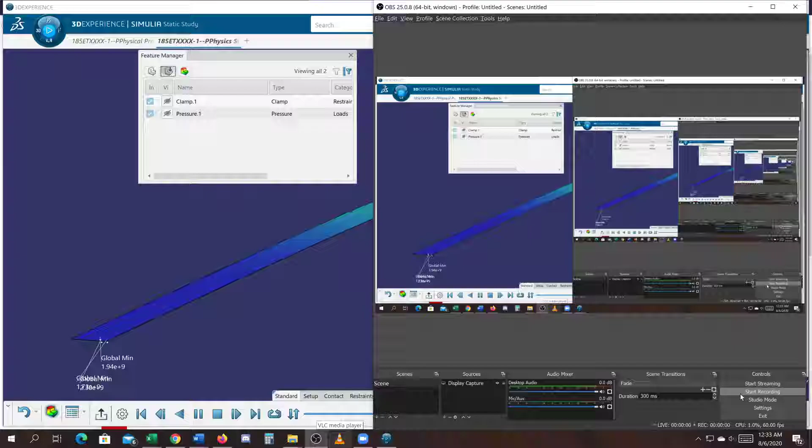This is going to be an exercise on the stress analysis package. This is what we're looking at, von Mises stress analysis. I have a load pushing straight down, and the end on the top where the red is flashing, this end has been clamped. So when we put pressure down on this plate, this end over here is taking on the majority of the load. This is where it's most likely going to fail.

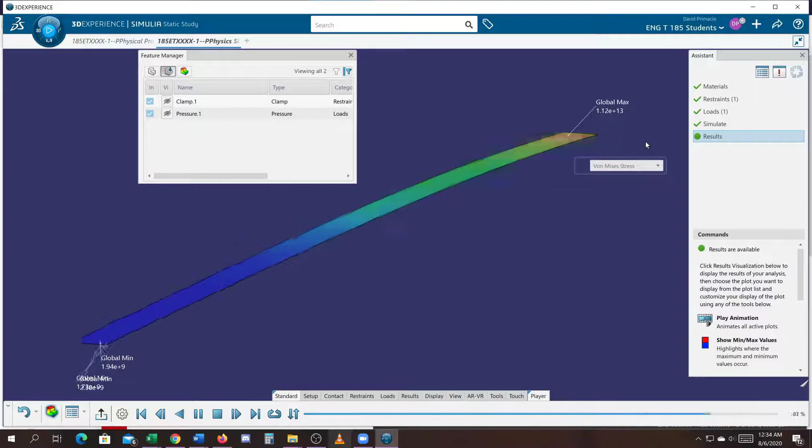So you can run the stress analysis package. There's several different types of analysis you can look at, starting with the first one, the deformation. Again, I've clamped the top end so it can't move, and I'm putting all the pressure and load on this end, and just showing you per pounds of pressure, however many pounds of pressure I've got. It's going to analyze the thickness of the plate, the type of material, and show you the range of motion you're going to have.

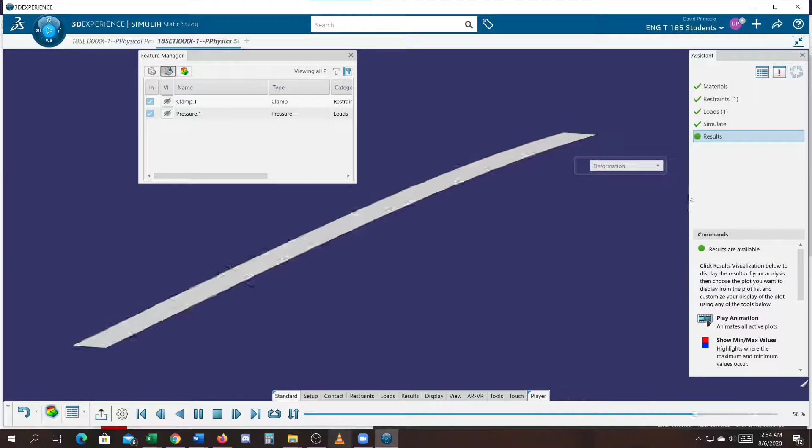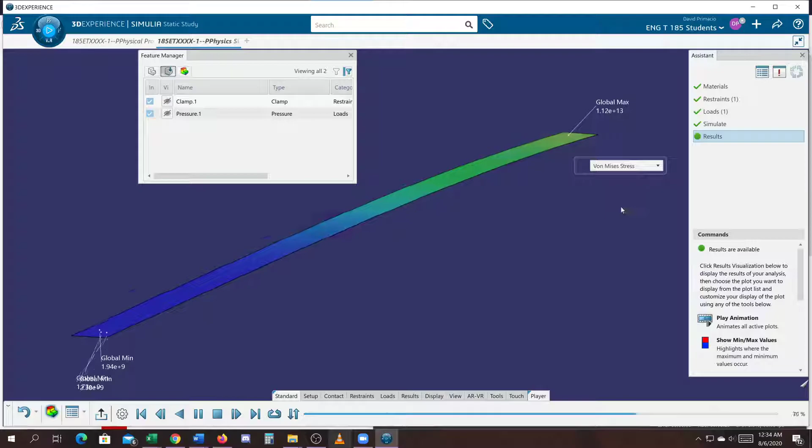The displacement, which is kind of the opposite of the von Mises stress, is this area over here is blue, and this one over here is showing the most red. This end is the end that has the most motion, and this end is the end that has the least motion. Versus the next one down, the von Mises, it's showing you where the greatest load is. And then you have factor of safety one, the red indicating when it's at a dangerous point.

And I don't know how to slow this down. I've tried, and my intuition is to try and go into these options and try and slow the settings down. But every time I hit it, it crashes. So I'm not really sure how to slow that motion down.

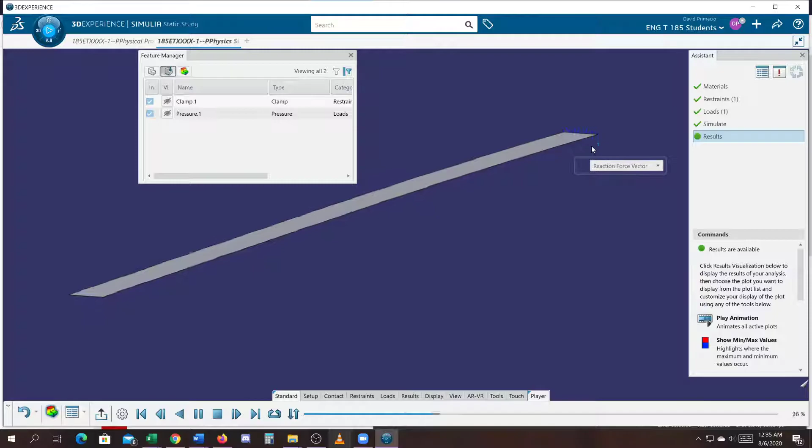This is the reaction force vectors. Okay, so when it goes, it's putting pressure down. One way where it's going to go up, it's showing pressure, and then where it's not going down as much, it shows a different color. So you got your different colors representing where there's more pressure and less pressure. And then

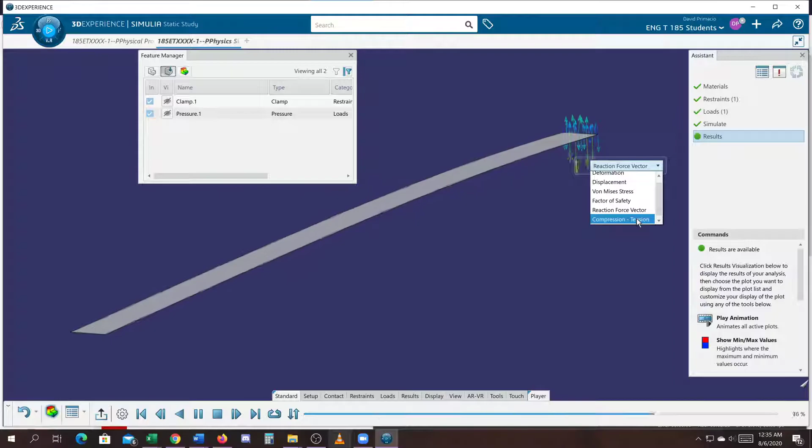the compression tension. So basically, if you're pushing pressure on this very end, the very closest part here is getting the least amount of stress on it. Over here is going to be the most, and as you work your way out like a fishing pole, kind of, you're getting more pressure on the part more towards where the clamping is. Rather out here, you're not really getting any kind of pressure on that plate.

So for people wondering how to work the stress analysis package, where it's gone, what they've changed it to, I'm going to try and do this from scratch, and we'll see how that goes. What I do kind of like about the new package is it has all these check marks going down the list. It's kind of like the prismatic machining, the NC programming section, where it checks it off when you've got everything you need. And then we get to the results and we get to play the animation.

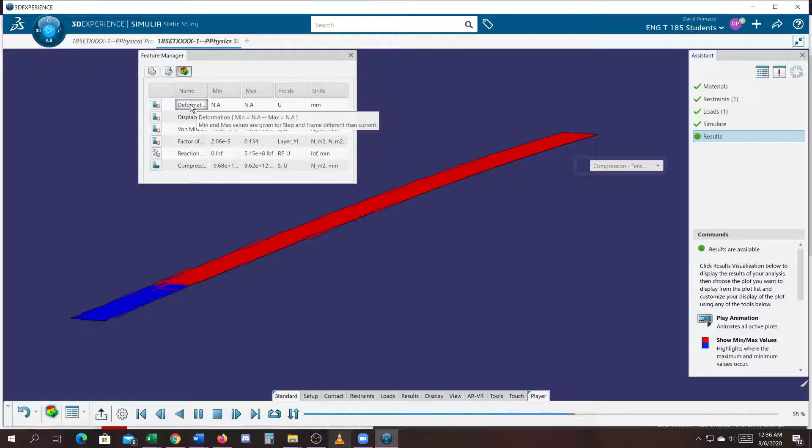So once everything's got the green check, you get to results, you get to hit play, and you'll get to see this. And in the analysis, you have information on each type of analysis that we ran. This could be downloaded onto a paper. So let's go ahead and try this from scratch. I'll just create a new part.

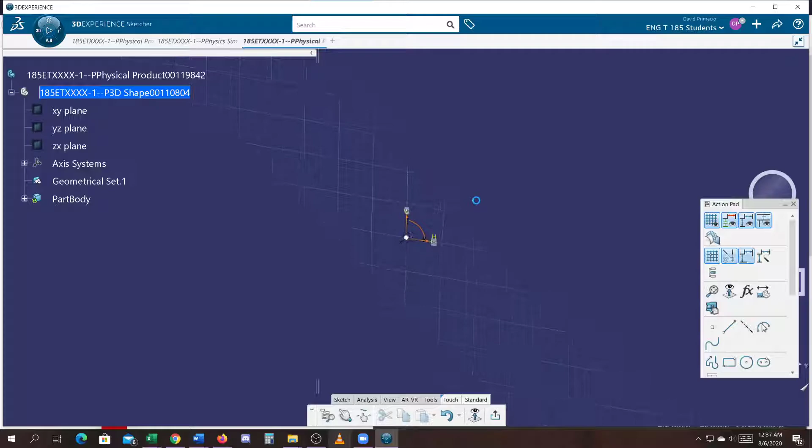And we'll make the part body the in-work object. We'll go into a sketch. And I'm going to sketch a really thin plate so I can have motion, make it crazy big. We'll start here, and I'll just type in the width. Type in a width of 20, and we'll just keep that a 1/10 of an inch thick height. I'll highlight this whole thing and auto constrain this. It's fully constrained profile.

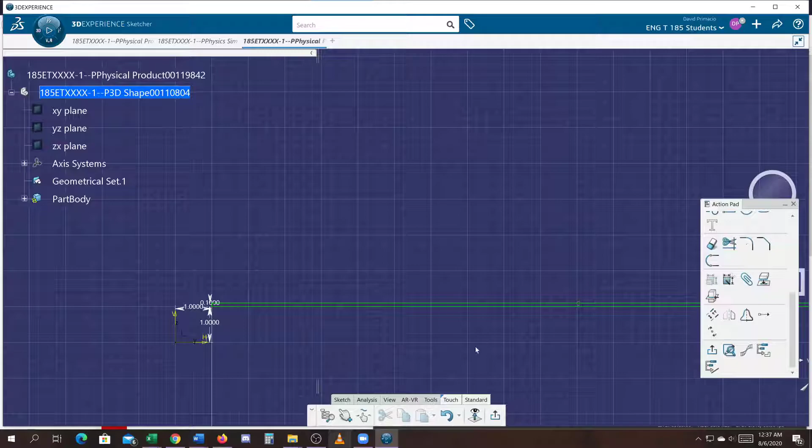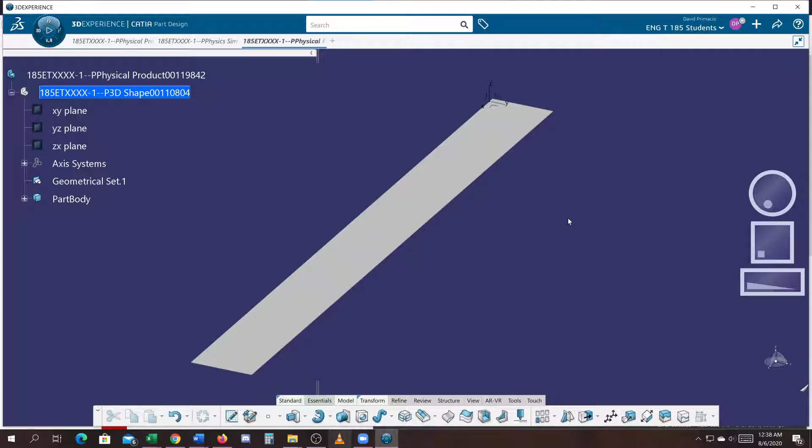We'll exit out and build a pad. And I'm going to make it pretty long. I'll go 200 inches. Okay, so I got this big, long, skinny plate, and I'm going to go into, it used to be called finite element or stress analysis or something here. The one I ran was called static study.

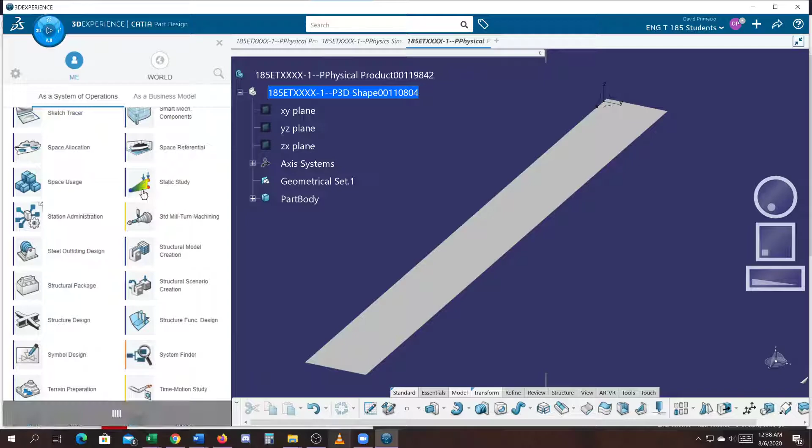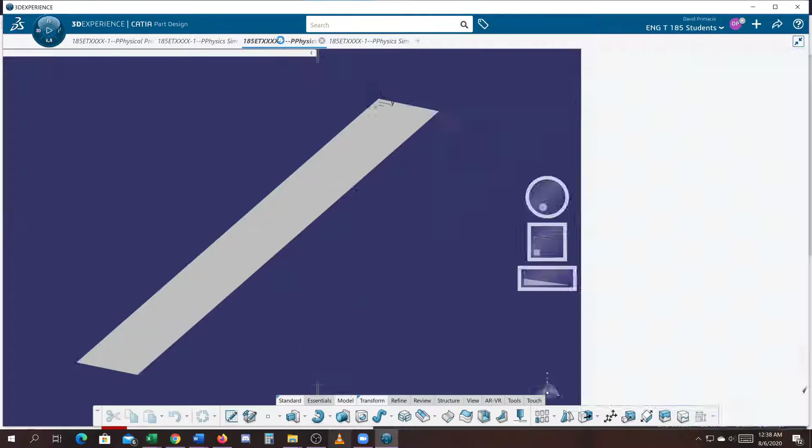Right away it's telling me I don't have any material. Now I can click on here and then hit material palette and then go add a material, go do a search and find the material. Or right in the middle of this, I could just go right back to the actual part itself. As you'll notice, the stress analysis creates a whole new working environment. So back in this part here, we can apply the material like we've learned in the previous classes

by applying material down here in the tools options. And I'm going to search for 6061 aluminum, and I want to get the one that says core, and that's the one I want to apply. So we're not opening it, we're applying that. So you go ahead and hit apply, and then you have to close this window off.

You'd think it'd know to close it off for us. I'm going to pick the top collector, which shows the material down here in the bottom.

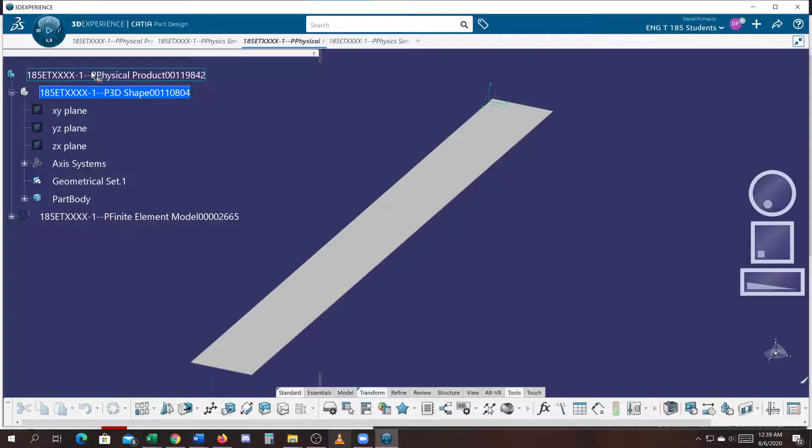There's your 6061. That all looks good, so I can go ahead and hit the close command. That's the green check in the top middle of the screen. You can just click that and it'll apply that material. When I go back into the part, you'll see that the green check mark has been applied for material.

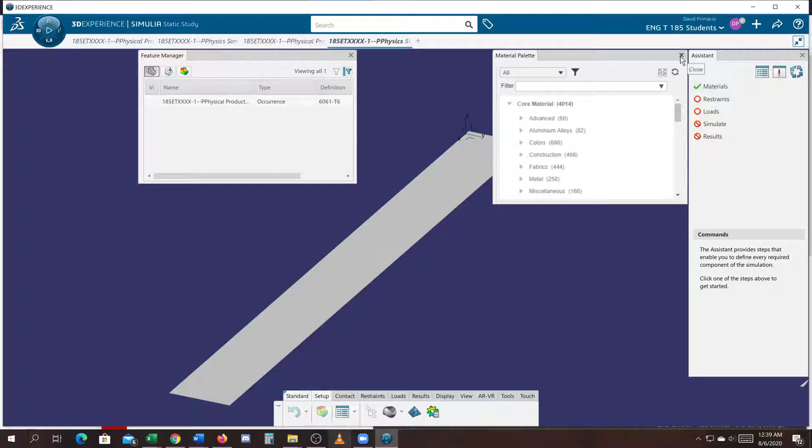Okay, so when you make your part, make sure you apply material.

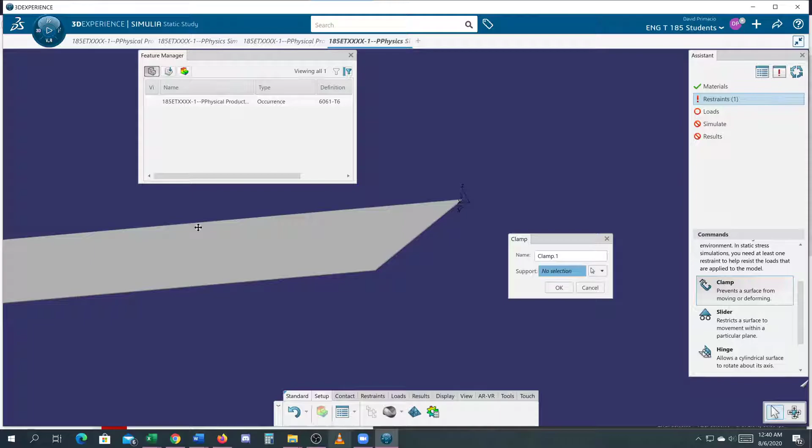And then for a restraint, you have clamps, sliders, hinges to work with. I'm going to do a clamp, and I'm going to clamp the surface all the way on the top. So right now I have nothing supporting. I'm going to zoom up. If I middle click right about here, it'll center that to the screen and also make that the center of rotation. Makes it easier to rotate that part and zoom in close.

Grab that face, and that whole face is what I'm clamping down. Okay, so that establishes an anchor, and if you go to the feature manager pop-up window up here, the middle one over here is the scenario where I've created a clamp.

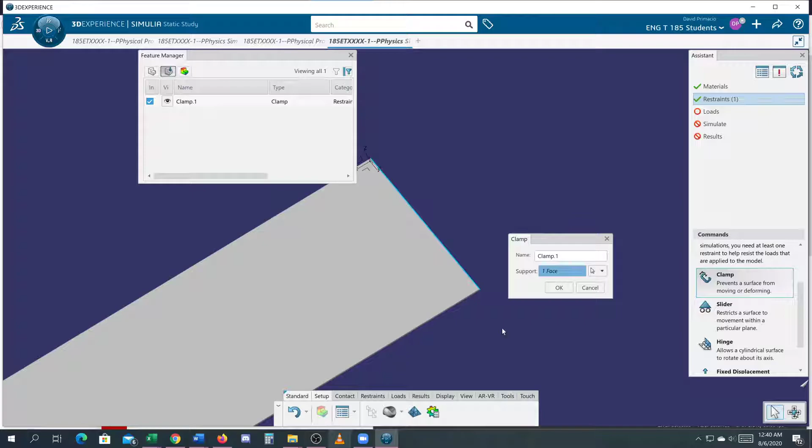I'll zoom back out, and you'll see in the assistant window that I've got my second green check mark. You could apply more clamps if you wish, but I'm just going to do the one, and I'm going to apply my load now. And you have different types of loads.

The load I'm going to apply here is pressure, and it comes in newtons by default. So I'm going to make a million newtons here, just really go crazy with this thing. Get a lot of pounds of pressure in there, and then pick the top surface.

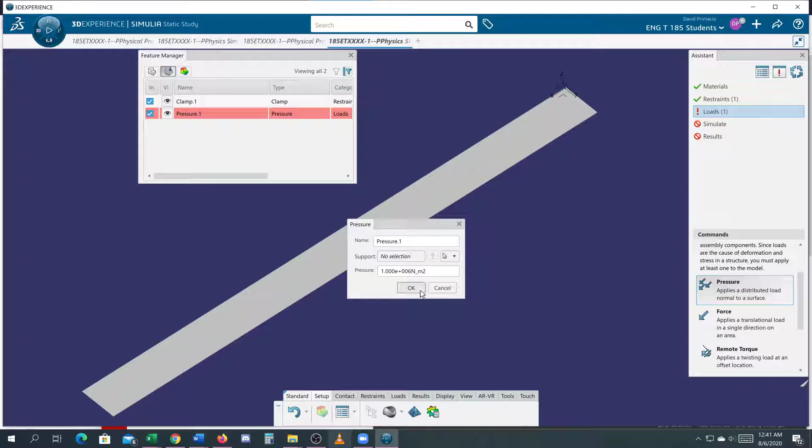Oh, wait a minute. I'm going to remove that. Pressure. Whoops.

And then support. So the more pressure you put, the more you'll get to see it bend. I'm just trying to put a lot of pressure on it just so you can see visually what's going on. I pick support and I pick the top surface, and that's where the pressure is going.

I haven't really found a way - I know there's a way, I can't remember - to put pressure just on that end. But I got pressure on my top surface, and I'll select OK.

Again, it had the green check on there, so I've got the first three things checked. You'll see I've got clamp and pressure in my feature manager window. The scenario is that one end is clamped, and I'm putting pressure on the top surface.

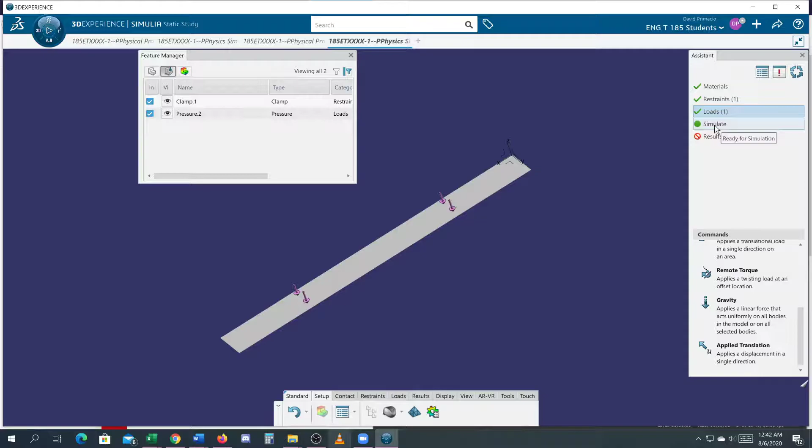I don't need to add any more, so I'll go right to simulate. And what you do is, it's going to take a while depending on your computer, but you click simulate start, and it's calculating everything for us.

Back in the days, you had to do a whole bunch of math to try and figure this out. Well, that's what it's doing right now. It's doing all the calculations to apply however many pounds of load or newtons of load I put on the top, and when I clamp that in, how that's going to affect that part.

So this could take several minutes. Oh, crap. I might have went too crazy on this.

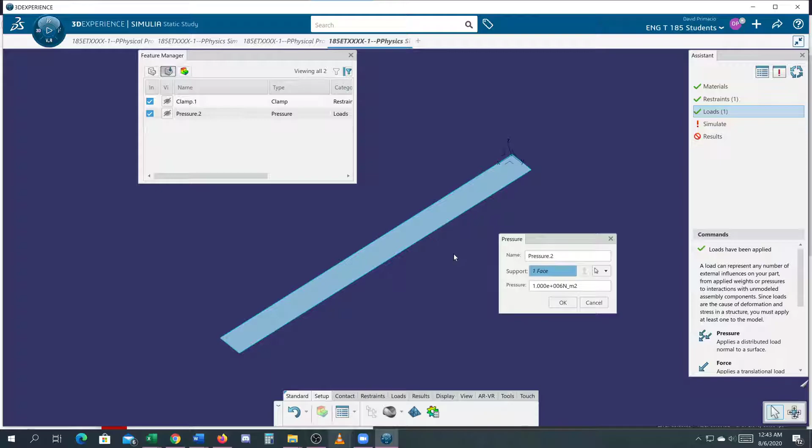So what I'm going to do is come back to my load, double click this pressure, and I'm going to change that. 1, 2, 3, whoa. 1, 2, 3, 4. So I got 10,000 newtons on here, and I'll hit OK.

Now I can come back to simulate and let it calculate. And now I believe it's going to say your number is a little more realistic. I can handle this.

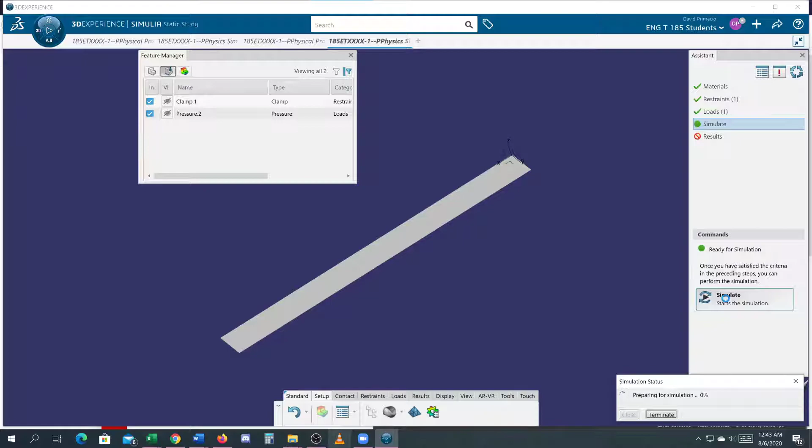If it goes too long, you might have to terminate that, but it will take several seconds. Son of a gun, why?

I'm only doing one clamp. That's what I did last time, so I'm not really sure why it doesn't like the restraints I have.

Let's delete the load, delete the clamp.

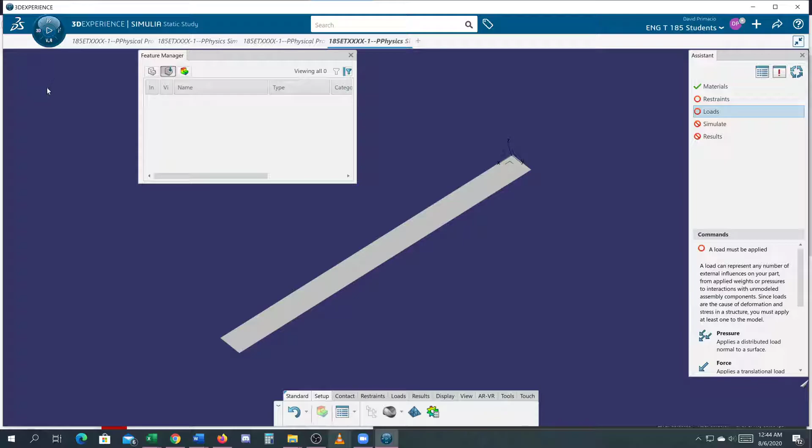I have 6061 material in there. Do my simulation, material's good. I'll go back to restraint, select my clamp.

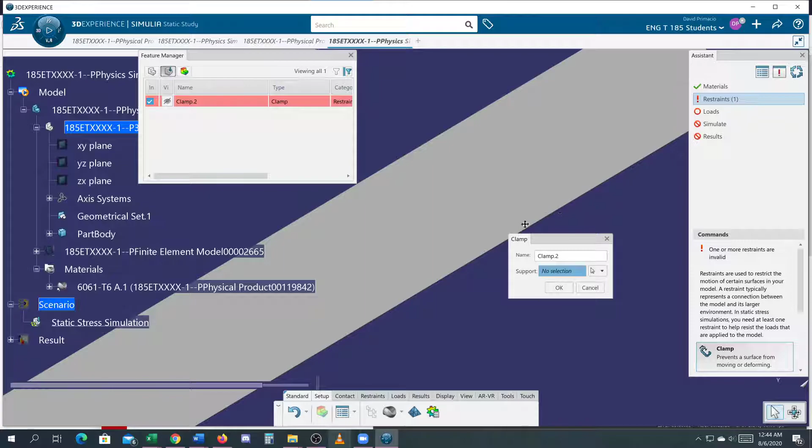I'm going to use a view command, zoom area. Just do a little drag so I can get real close to that. Pick that face. ISO, fit all in.

That's green, tells me I've got my restraint. I'll say okay. I'll go to my load, put pressure on the top surface.

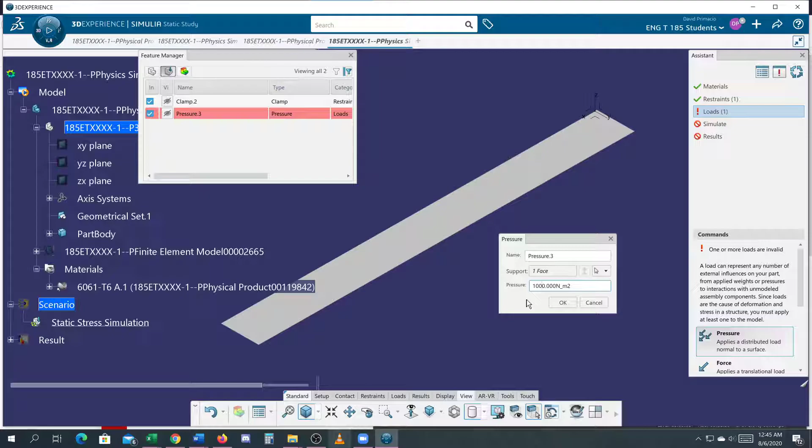I'm going to put 1,000 newtons again, use the same one I did before. I said okay, I've got my clamp and my pressure in there.

Simulate, click simulate here, and again it will take several seconds, and hopefully this time it will work. I used the same number, same parameter, same everything, so if it works now, I'm not really sure why it wasn't working the first time.